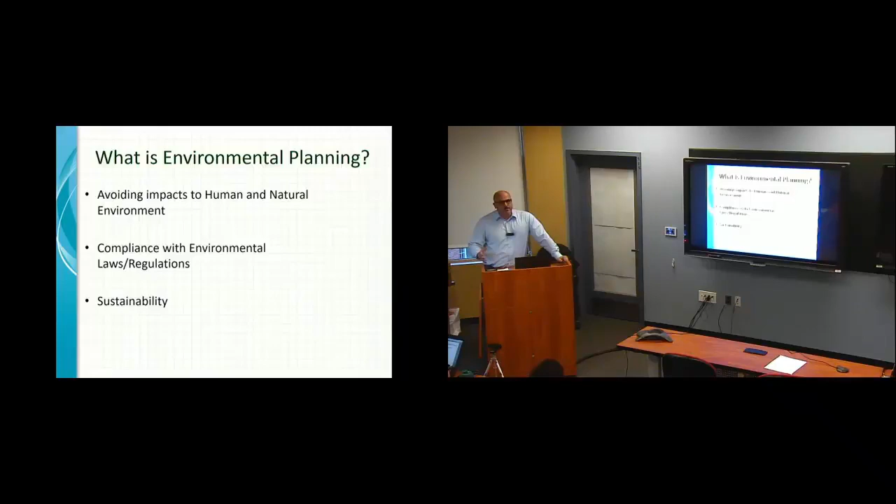I'm going to list the main regulations of planning a project. We have NEPA. How many have heard of NEPA? Okay, that's actually a good turnout. NEPA is the National Environmental Policy Act, which kind of set the stage for many of our environmental laws. Then on the state level, we have the New York State SEQRA, the State Environmental Quality Review. We're here in New Jersey, so I did some research on New Jersey. We have Executive Order 215.

Then we go back to a local level. New York City has a very comprehensive planning manual to help us build projects in the city, because it's very unique in the country due to the density and the different neighborhoods. Then we'll touch a little bit on environmental permits and law, some of the more common ones that I deal with for our capital projects. We'll talk about site assessments, which are more site-specific and deal with hazardous materials on sites. And then we'll look at some case studies. I'll try to bring it all together and describe some of the projects I worked on.

NEPA, as we said, is the National Environmental Policy Act. I thought this was a nice statement at the preamble of NEPA. This is really a very important milestone in the country to try to bring forth and protect the environment. You can read it on the board there, but again, it's really trying to protect the environment as we progress and as we build new technology and new projects. It was really our greatest effort to try to plan correctly as we go forward.

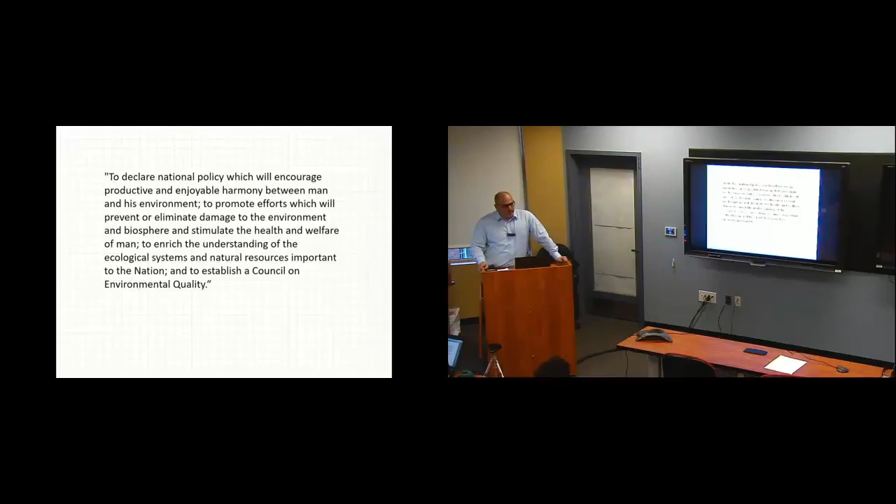NEPA requires, again, federal agencies to consider and calculate the environmental effects of proposed actions before going through with those actions. Now, a federal agency, obviously those are defined, but it also affects if there's federal funding in the project, you have to follow NEPA. So it's any federal action. You have to look at environmental, social, and economic effects.

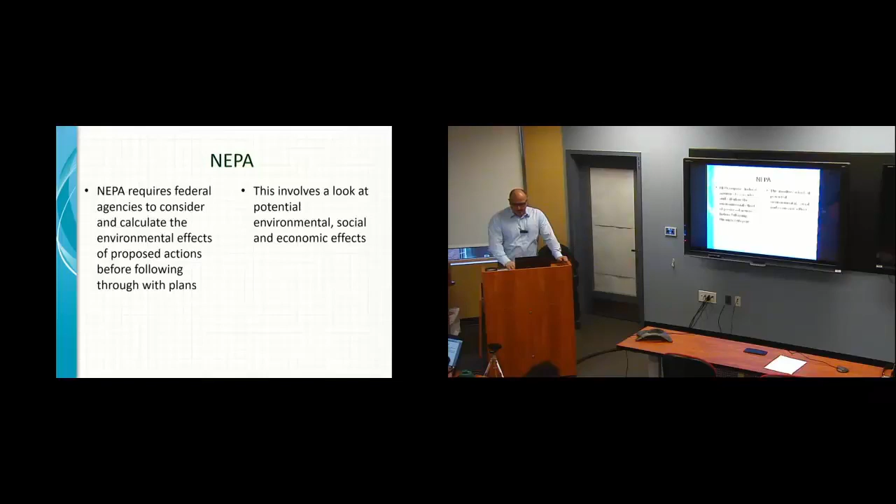Some terminology with NEPA. These are the different levels of environmental review. This will probably be new to many people, maybe not. What we have is a CATEX, which we call categorical exclusion. These are run-of-the-mill projects, routine projects. The next step greater than that would be an EA, or an environmental assessment. And that hopefully gets you a finding of no significant impact, the FONSI. And the last one at the end is an EIS, or environmental impact statement.

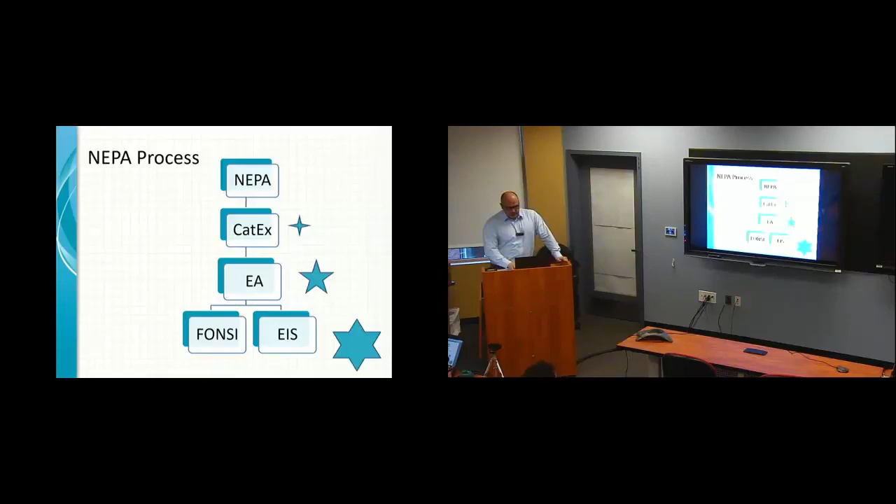And again, you have NEPA as the overarching environmental policy, and with these different reviews, basically you're increasing your review as you go from top to bottom: the CATEX, the EA, and then the EIS. Some of the main impact areas and evaluation points. So NEPA makes you take your project and basically do a screening on it and look at the various impact areas that your project may affect.

Public outreach is big in NEPA. They require you to go early and often to the public to get public input. The public many times has good ideas, and they're usually very familiar with the area you're building in. So you look at various areas like traffic, socioeconomic, public open space, urban design, cultural resources, air quality, the whole gamut of environmental impacts.

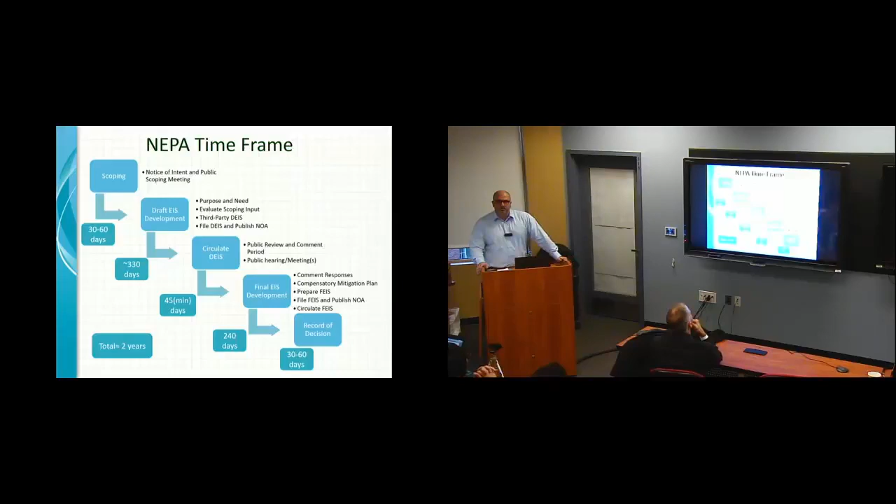Here's an example of a NEPA timeframe, and I put a few timeframes up there just so that you realize that this is not a quick process. This can be a lengthy process, and this has to be integrated into your project schedule. So for example, scoping, which is basically getting the project description out there to the public, maybe holding a scoping meeting. It's really formulating the project and getting a good, solid project description, and then going through the environmental impact statement process and reviewing the environmental impacts. And usually a typical EIS could take about 2 years before a project is launched.

The New York SEQRA law, State Environmental Quality Review, is analogous to NEPA, but specific to New York State. Much like the national guidelines, these are set for government agencies doing work. And here's just a little flow chart. Usually a proposed action is created by the agency. For example, let's say MTA wants to build a new bus depot. You classify that action. You establish a lead agency, usually the agency building the project. Then you determine significance, and then you determine if an EIS is warranted. And finally, after you finish your environmental impact statement, you have findings and an agency decision on whether to go forward or not. Then you can finally build your project.

So to give you examples, according to the SEQRA law, there are different types of projects. There's a Type 1 project, and an example of a Type 1 would be building on anything greater than 10 acres of undeveloped land. That usually requires an EIS, just to give you some scale of what we're talking about here. So if I wanted to build a 10.1-acre parking lot, normally that would require an EIS because I have to look at a lot of impact areas, including traffic, air, noise, etc.

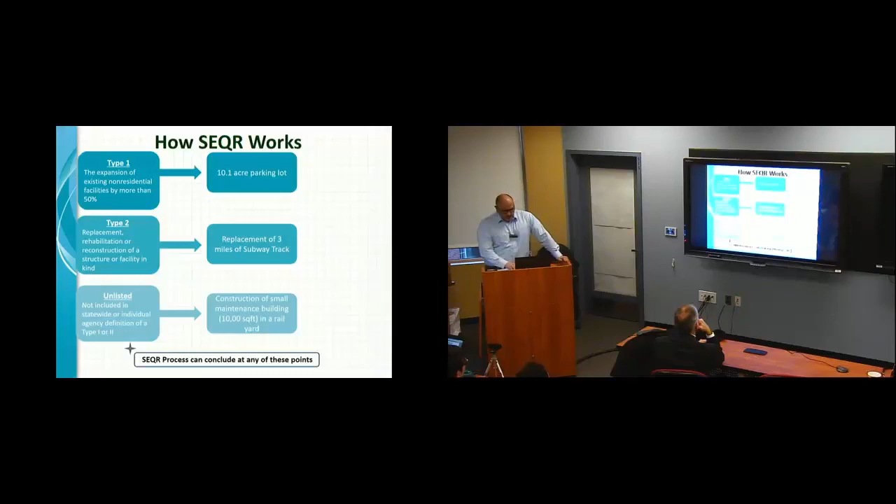Type 2, these are usually replacement in kind projects, and they require very minimal environmental review, if any. They may be exempt from the law. So for example, if I, as an MTA owner, wanted to replace 3 miles of subway track, although it's a very long stretch, it's really replacement in kind, so it's not really affecting the environment because the track is already there. Building new track in a new area would be a different story. And then you have unlisted actions, which are not Type 1 or Type 2, so they're kind of gray areas, and you have to use your judgment on whether you want to do an EIS or an EA.

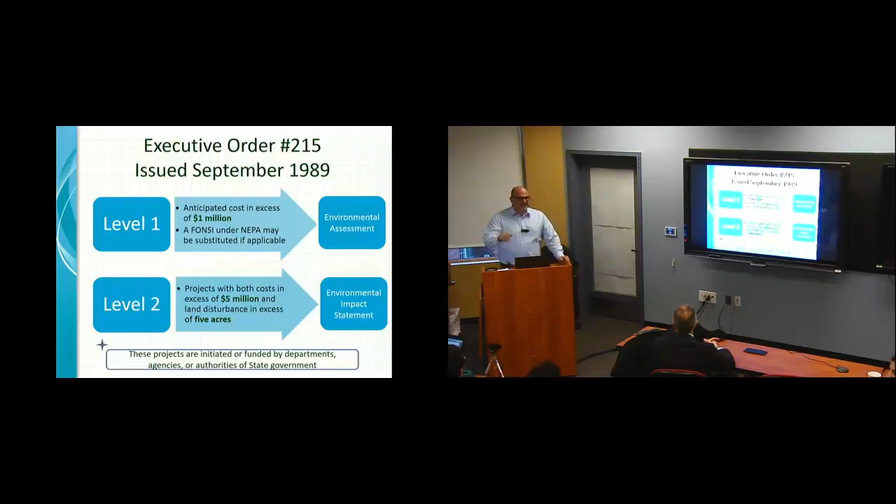Getting across the river into New Jersey, we have Executive Order 215. Is anybody familiar with Executive Order 215? Okay. Let me know if anything sounds incorrect. We have a Level 1 study, which requires an environmental assessment, or EA, and that's the lesser of the studies. Any public action that costs greater than $1 million would require an environmental assessment. And then you have Level 2, which are projects that usually require an EIS, and they're over $5 million.

However, there are many projects that are exempt. They don't want you to frivolously do environmental analysis. So a lot of replacement in kind projects are exempt: maintenance or repair, expansion of existing buildings. They realize that many projects are just rebuilding or rehabbing the existing condition, so they don't want you to go through a process that's not necessary.

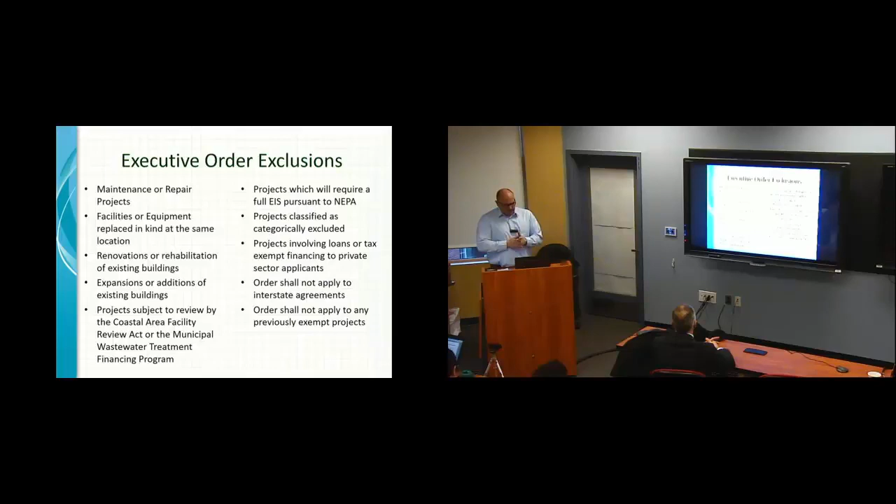Coming back to the local requirements, you have New York City CEQR, City Environmental Quality Review. Anybody heard of CEQR? So if you go online, there's a pretty large manual, guidance manual on how you do environmental impact statements and environmental analysis in New York City. And it's really our adaptation of NEPA and SEQRA into one manual.

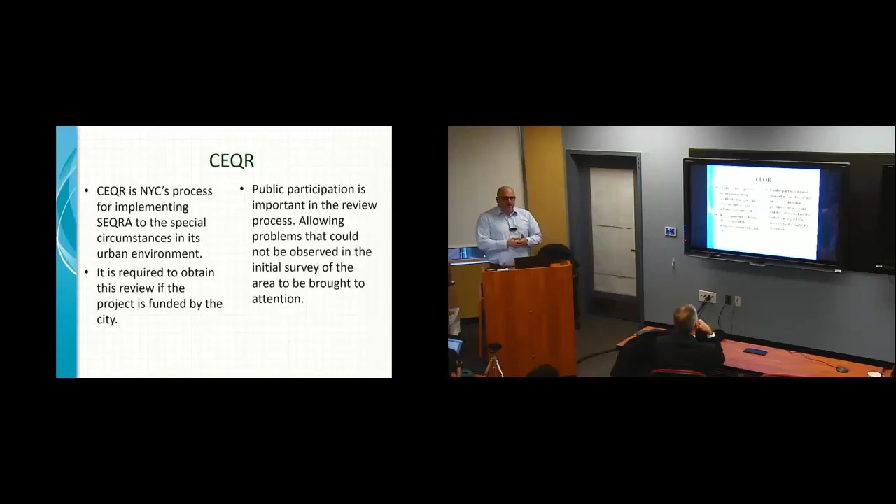Because NEPA and SEQRA are really just guidance. They talk in generic terms. I think they feel it's up to the professional judgment of the engineer or planner to do the appropriate environmental analysis. In the case of New York City, because of our population density, our building density, we have a set of guidance that we follow.

And CEQR does very good. It's very good at almost like a cookie cutter or a good table of contents where you can look at that manual and go through the various impact areas. And I'll just go through each one with a little picture just to show you what type of analysis we were talking about. So let's say look at land use, zoning and public policy.

I don't know if you know, but New York City, I believe, was the first in the country to adopt zoning. So once you're in a certain neighborhood, you can only build certain things. You have zoning for manufacturing, commercial, residential. Fortunately, MTA is exempt from zoning because obviously we have a unique situation where we're building a transit system. But if you were a private developer or another public entity, you would have to maybe comply with zoning and build within the character of the neighborhood.

Socioeconomic conditions. There's environmental justice, I don't know if you ever heard of, but you want to make sure that your project doesn't disproportionately affect minority or low-income populations. There's laws for that, and there's screening for that as well. Well, you don't want to affect any neighborhood, you don't want to affect badly the socioeconomic condition of a neighborhood. So you have to study that for your particular project.

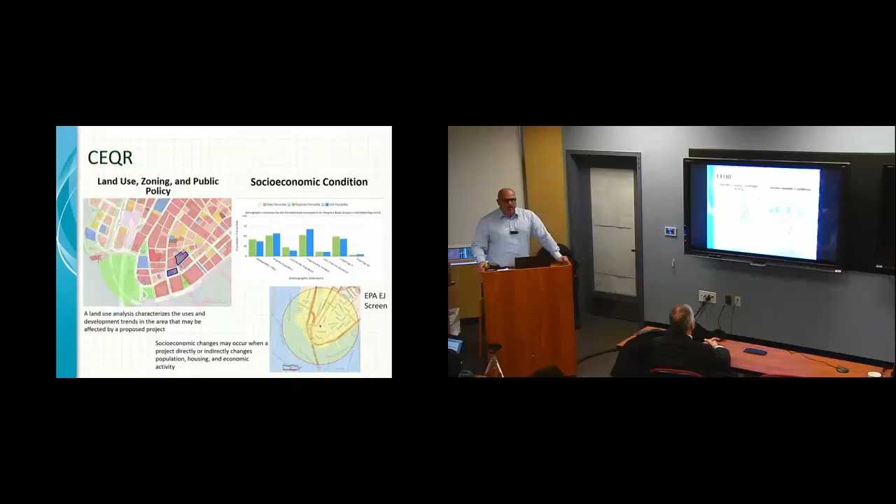So if I'm building a new subway station, usually that is a good thing for the socioeconomics of the neighborhood. Brings people in and allows people to get to the job markets. Community facilities and services. So if you're building a project in a certain neighborhood, you have to make sure that that neighborhood can accommodate your project. Does it have enough police? Does it have enough fire? Does it have enough schools to accommodate your project?

Open space. Parklands are afforded lots of protection under the law. New York City has a lot of zoning for open spaces. You want to make sure that your project is not affecting the open spaces in an area where people can go and have recreational activities.

Something unique to New York City is shadows. You want to make sure your project is not affecting an adjoining building. So for any building you build in New York City that has public funding and that is taller than 50 feet, you have to do a shadow analysis. So you would do a modeling, and you would see how the shadow affects adjoining buildings and even the streetscape.

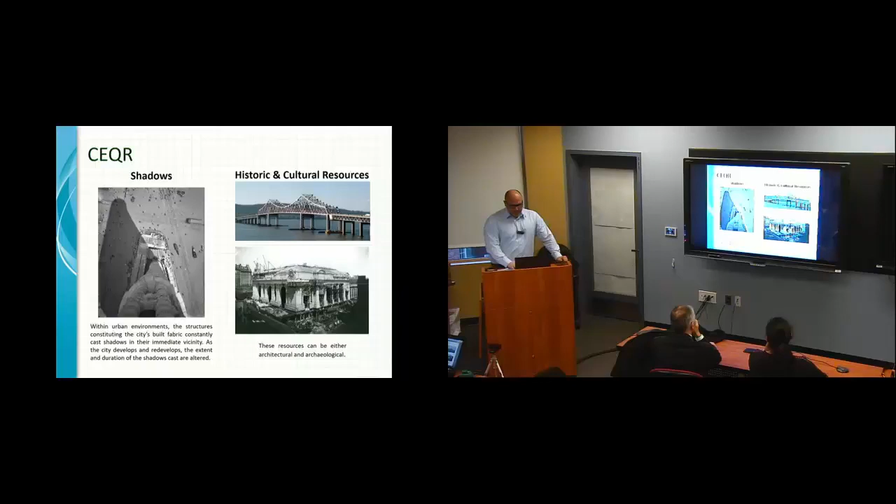Historic and cultural resources. We have many buildings here in our area that have both historic significance and cultural significance. So you would have a professional look to see how your project will impact those sites. Urban design and visual resources. You'll see how your project is integrated into the neighborhood, to the aesthetics. You want to make sure that you're trying to fit into that and not be a blight on that particular neighborhood or site.

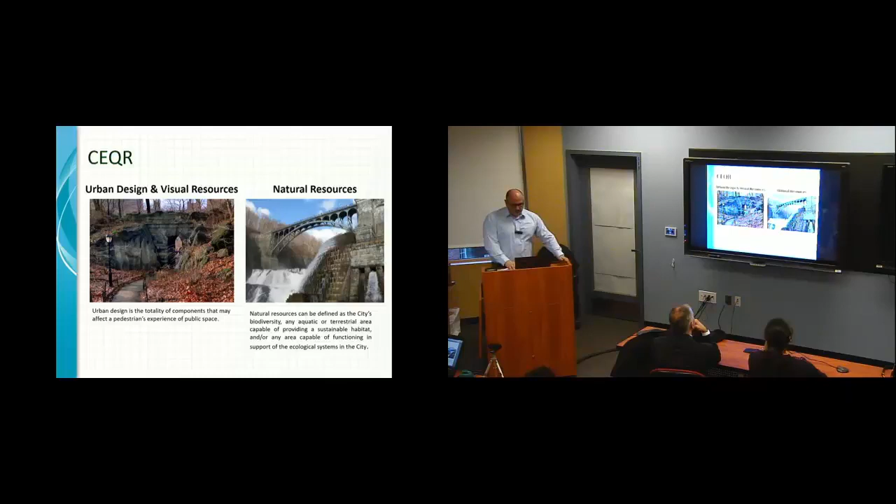Natural resources, you want to make sure you don't affect the water quality, wetlands of a particular site. We would hire third-party consultants and specialists to look at these, to see how this project is affecting the natural resources. Hazardous material. Anytime you build anywhere and you excavate, there are unknown conditions. You never know when you're on top of a Superfund site or if there's been illegal dumping at a site.

You want to make sure you do your due diligence, do historic records, maybe do some soil borings to see where you build, to make sure that you're not going to encounter hazardous materials, or at least have a plan in place so that if you do encounter them, you know how to treat them. Water and sewer. Again, you're building a project. You want to make sure that you have water utilities. If people are living there, obviously they need potable water, sewer. You want to make sure that that facility or infrastructure can accommodate that new project.

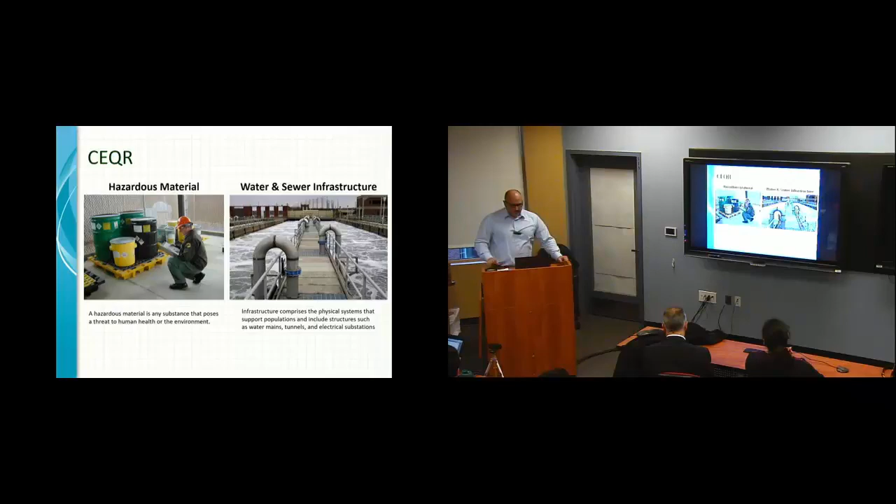Solid waste and sanitation. Same thing, if you're building a building with a large number of people, you're going to produce garbage, and you want to make sure that those services are available and they can accommodate you. So you do a study to do that. Energy, again, your project may have energy requirements, so you would do a study to see if there's enough utilities in the neighborhood to accommodate you.

This is very important for MTA when we build new stations. Obviously, we have large power requirements. We have trains running, we have a lot of lighting requirements, so we want to make sure we go to Con Ed, we tell them what we're going to do, and then they'll come back and give us comments on the project. Transportation, we want to make sure there's enough mass transit and roadways on your particular site to accommodate your project.

Air quality. How will your project affect the air quality in the neighborhood? We study both construction and operational impacts. So if you're building a new sewage treatment plant, how will that affect the air quality in the neighborhood? Or construction, how will the construction dust affect the air quality in the neighborhood, and what are you doing to mitigate that?

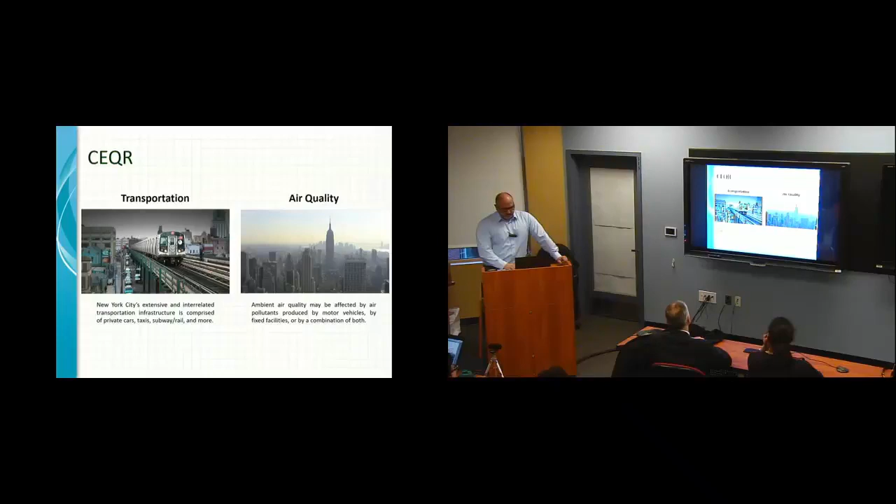Something that's been recently added, greenhouse gas emissions. How are you affecting the greenhouse gas emissions in the local region, your particular project, especially in the operating condition? What are you doing to mitigate that? Noise. Probably the biggest complaint that we get is about noise. Noise and vibration, I should say.

Anytime you're doing any type of construction, again, you're in a very tight environment, especially in New York City. We have a specific New York City noise code that we have to follow. It's pretty strict. So many times jackhammers have to be outfitted with some type of noise mitigation equipment. And the workers can only work at a certain time, usually from the hours of, I would say, 8 a.m. to 6 p.m. And if you want a variance, you'd have to go to the New York City DEP to get that variance.

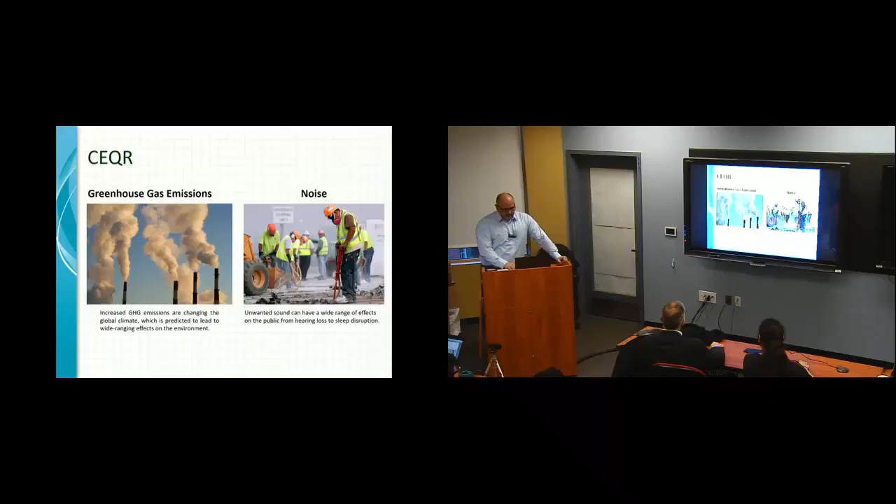And even in your operational conditions, once you build your project, for example, if you're building a new subway station or a new building, will the trains passing by affect the residences that are nearby? And how will they affect the residences? So usually as part of the environmental impact statement, you would do noise modeling to see how receptors are affected. Neighborhood character. Again, do you fit into the general neighborhood character of the particular city or region that you're building in?

Construction impacts. Construction impacts are, again, very big in the city, and very, very big for us. Because most of our projects, usually on the operational end, perform a good service. We give mass transit to people. Usually people like it. Sometimes people don't believe it. But usually construction impacts are our biggest issues, and where we receive our biggest complaints for projects. Because they're lengthy projects, they're noisy projects, there's obviously lots of heavy machinery, so we try to do our best to accommodate the public.

And general public health. How is your project affecting the general public health? Whether it's air quality, noise, aesthetics. I'll go through a little bit of environmental permits and laws now, but it's a good place to stop.

So, a lot of aspects, and I'm thinking some of them are fairly subjective, like fitting into neighborhoods, appearance, and so on. And some of them are objective, but getting to an answer requires very sophisticated, probably expensive modeling, like air pollution, CO2. So in practice, how do people handle all those variables? Each of them requires a PhD thesis to carefully analyze.

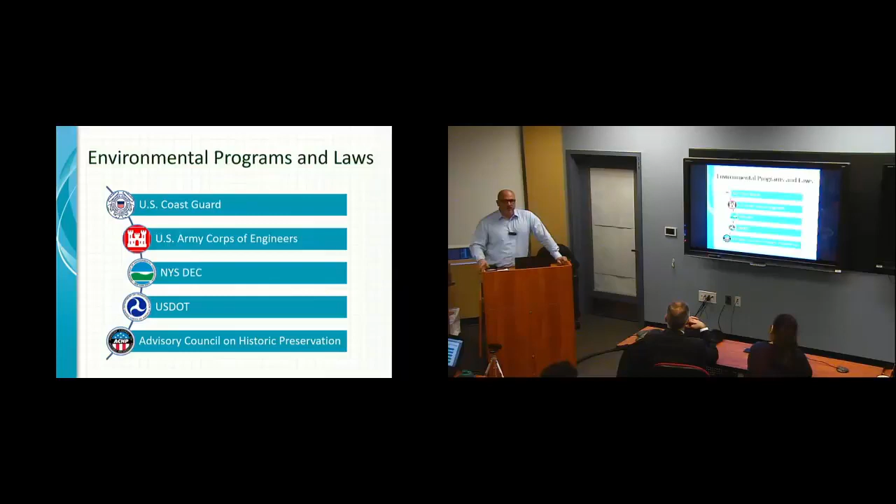One of the more common permits, anytime you're building or affecting water or wetlands, obviously very important as part of the environment, is the joint permit between Army Corps and DEC. So if I'm doing some construction on the water, for example, I'm doing some construction now on the A train in the Rockaways. We're rehabbing some of the track there, and we have to come with a barge.

We would have to notify the Coast Guard, since it is a navigable waterway, so they have to be notified. And also get the permit from DEC and Army Corps to make sure that we're using best management practices not to affect water quality and protecting the wetlands. And they might make the decision that we have to mitigate the wetlands in some way. So many times, if the wetlands are overgrown with invasive species, they'll make us mitigate and do it properly.

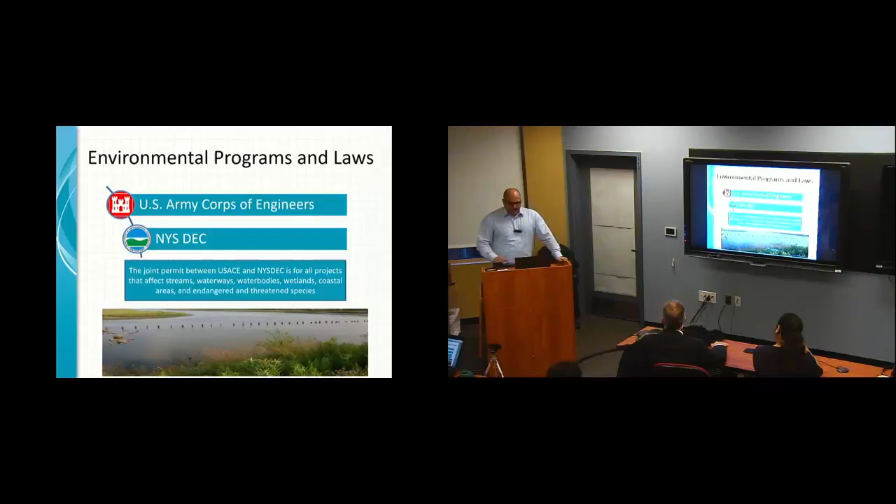Another popular permit is the State Pollutant Discharge Elimination System, SPDES permit. That's meant for outfalls of stormwater into any type of water bodies. For example, for one of my projects, I had a bus depot where we had to build our own storm sewer because there were no utilities in the area in Staten Island. So we had to go through this process to make sure that we're not polluting any water body. We're building a new sewer, and we're making sure that the water that comes out of it is clean. We'll go through a case study on that.

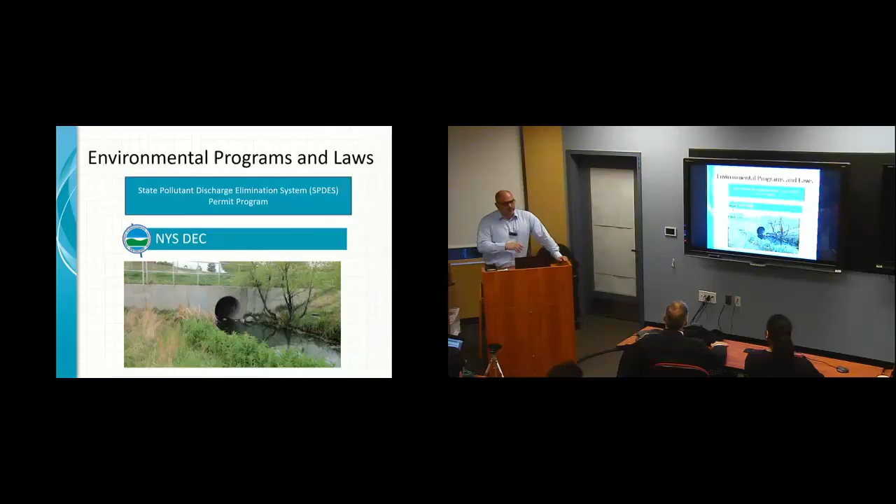So we have subway stations that are adjacent to parks. Sometimes we have to take parkland, even just temporarily. So they want to make sure that we're doing it in a way that the public is happy, the public is notified, and that we're actually enhancing the park after we leave.

Advisory Council on Historic Preservation. This council was created when the first historic preservation laws came out. I don't know if you know the story of Penn Station. Penn Station was a beautiful structure at one point and was taken down, I believe in the 60s. And I think that there was an outpouring of people concerned about historic preservation in the city, and then laws started to come out on protecting historic preservation.

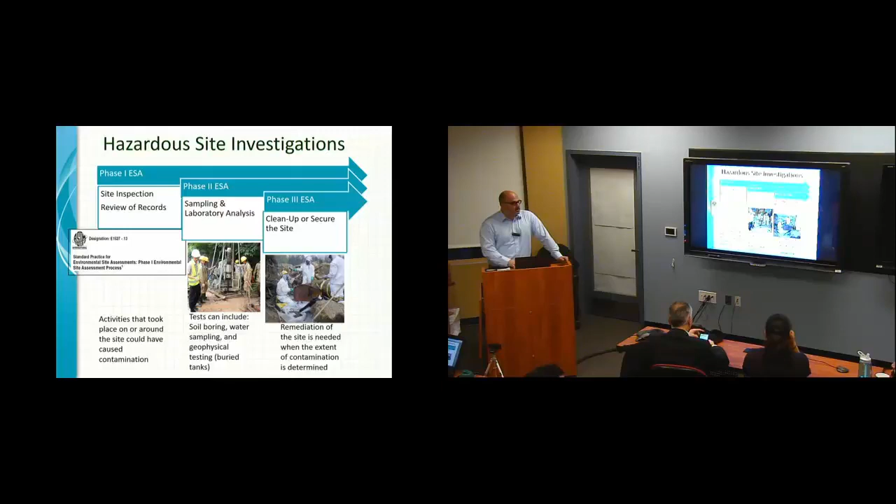Right. But finding land is a big part of our capital program. When we need a new bus depot, or let's say the Second Avenue subway, when we're going outside of our right-of-way.

I'll go through a couple of case studies now just to highlight some of the important issues. These are tremendous projects. These are big projects in that you could spend an hour on each of them if you wanted to. But I'll just highlight certain areas that I think are important and kind of emphasize what I've

spoken about. Tappan Zee Bridge, I'm sure many of you know that the Tappan Zee Bridge is being replaced and is under construction as we speak. It was the new New York Bridge. It was obviously there to keep the vital connection between Rockland and Westchester County. MTA was involved. I believe they were thinking about putting a rail line on the bridge. I don't think it's going on now, but I think that is a future possibility.

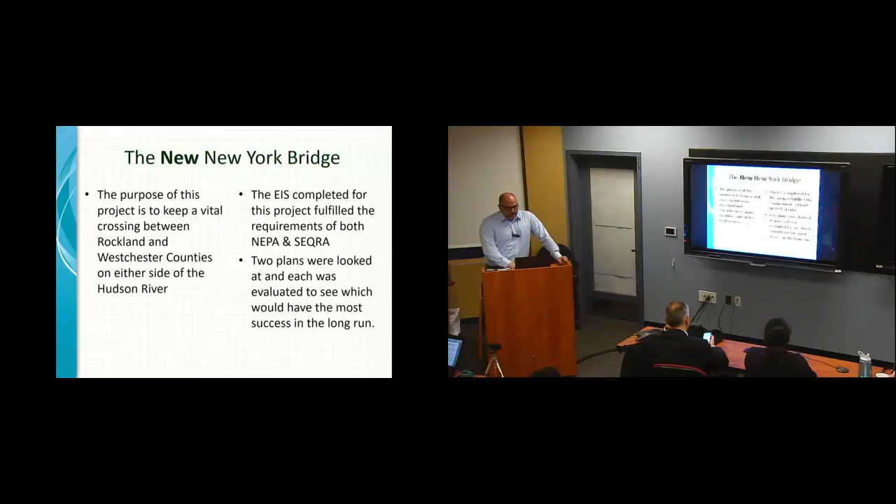The EIS was completed both under NEPA and SEQRA because they did receive federal money. Both laws were complied with. And obviously, they did an extensive alternative analysis when they did the Tappan Zee Bridge. Lots of waterworks, so you had lots of permits, Coast Guard, it's a navigable waterway. Army Corps and DEC are doing dredging, moorings in the water, a lot of construction in the water. So you had to get vital permits and make sure you're following best management practices not to affect the water quality while you're building the bridge.

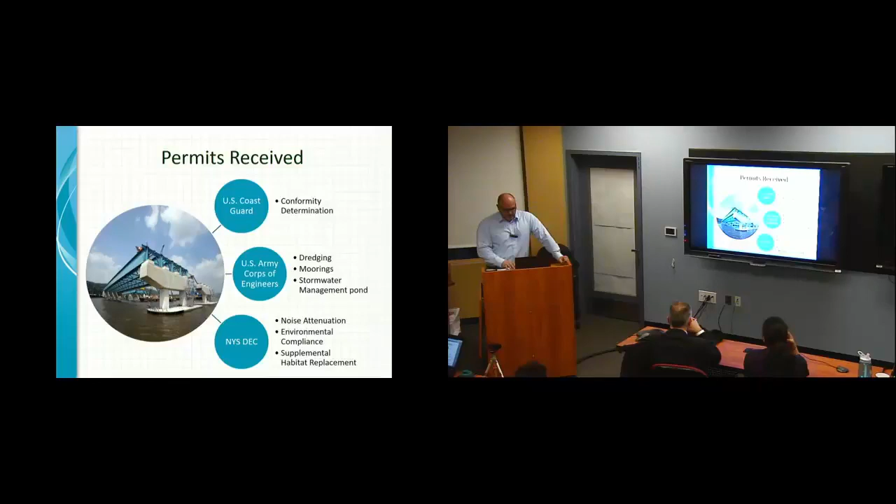One of the studies I had found out in my research is that they wanted to see how the wildlife or aquatic life was being affected when they're doing pile driving for the bridge. And they did, I think, find out that some aquatic life is traumatized by pile driving, noise and vibrations. So they tried to mitigate as best they could during the construction process.

Good psychological health for the fish. Yeah.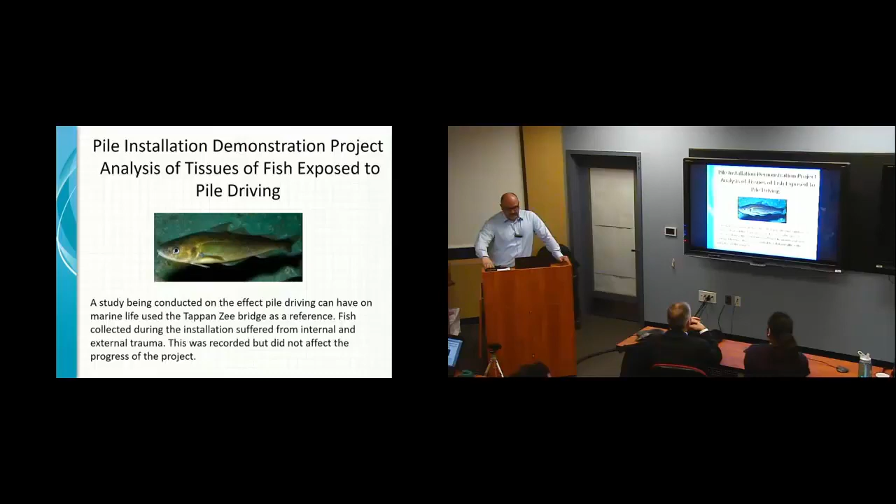Just to give you an example of the timeline of this project. So New York State announced the start of an EIS, Environmental Impact Statement, in November 2000. The EIS was published in 2002, and it took 10 years to develop that EIS into a draft form, March 2012. So they went through extensive alternative analysis and impact analysis, community outreach, community boards. I'm sure a lot of politics were at play, budget is at play, but it took, again, you can see from 2002 to 2012.

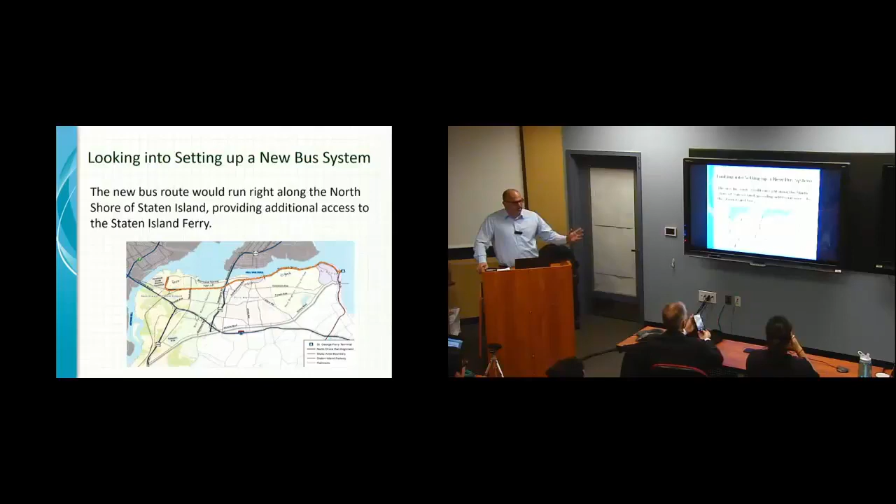It's a little bit too expensive, we feel, to try to reuse the track and put a subway corridor there, which would be probably double the price. So it would be much easier to use that land and maybe put bus rapid transit to move people from the west side of Staten Island to St. George terminal. And that's being studied as we speak.

Put the little bus on the tracks. There's a picture of the abandoned freight line. A lot of things that we have to look at are property ownership. We're adjacent to properties all along the right of way. Sometimes we maybe need a little bit more space, so we have to do real estate transactions or try to get additional property.

Shoreline stabilization and resiliency. Since Hurricane Sandy, our standards have changed in terms of flood protection. We're no longer just designing to the 100-year flood, which was done for many years in the 100-year floodplain. Now we're designed to category 2 plus 3 feet, which is probably the equivalent of the 500-year flood plus 2 or 3 feet. So a much higher design standard for work near the water. So we'd have to rebuild the bulkhead there, as you see.

Noise and visual impact for residences. Now, if you live there, instead of an abandoned freight line, you now have buses running in your backyard. So you want to study how the noise or the visual impact will affect you. And we're also looking at pedestrian access, whether we put a bikeway there or a walkway. And I guess this would go through the EIS process. And we would seek to get federal money, so we'd go through both NEPA and SEQRA.

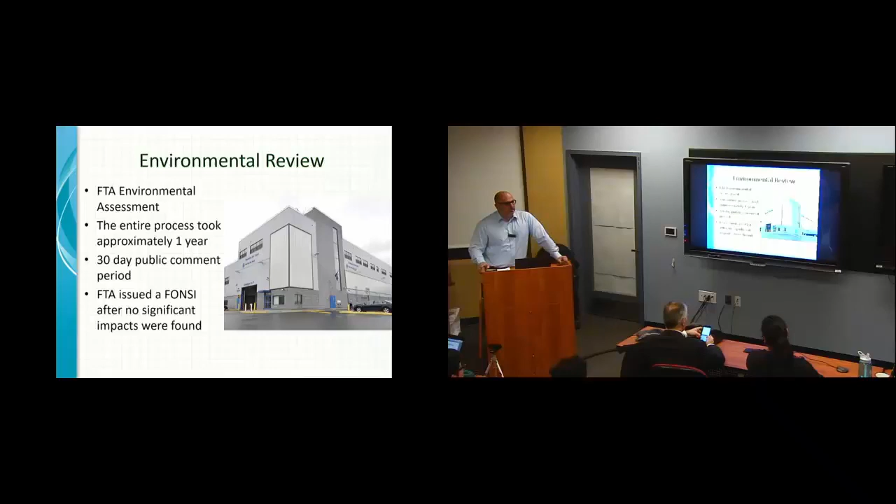Obviously, when we build a new bus depot, when we induce traffic, new buses in the area, we're looking at air, traffic, and noise. Those are the big three. We have a lot of mitigation measures there, I'll go through quickly, because we had to build our own storm sewer. So we went through the SPDES process from New York State DEC.

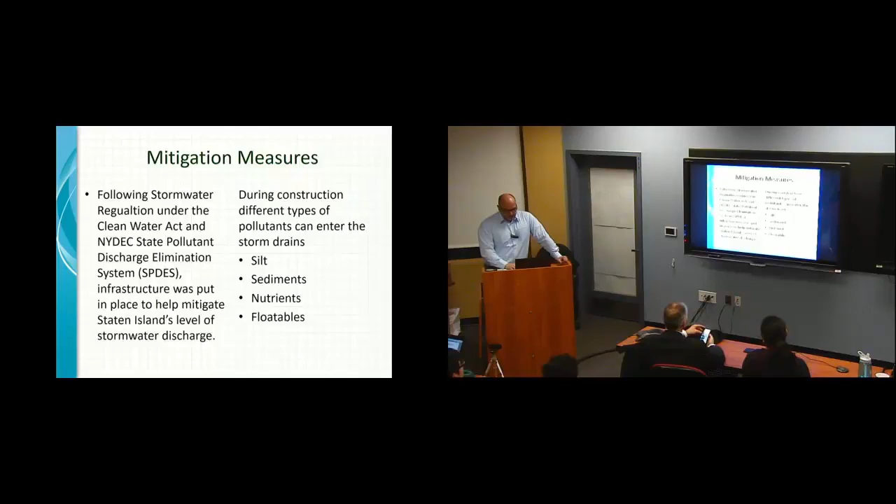So you basically have undeveloped land where water is filtering into the ground, but now you paved it, so now you have to take that water and drain it properly. So we had to build a new storm sewer going into the Arthur Kill. It was a challenging construction site because there was lots of clay, it did not filter well. As you can see, on a dry day, we have a swimming pool.

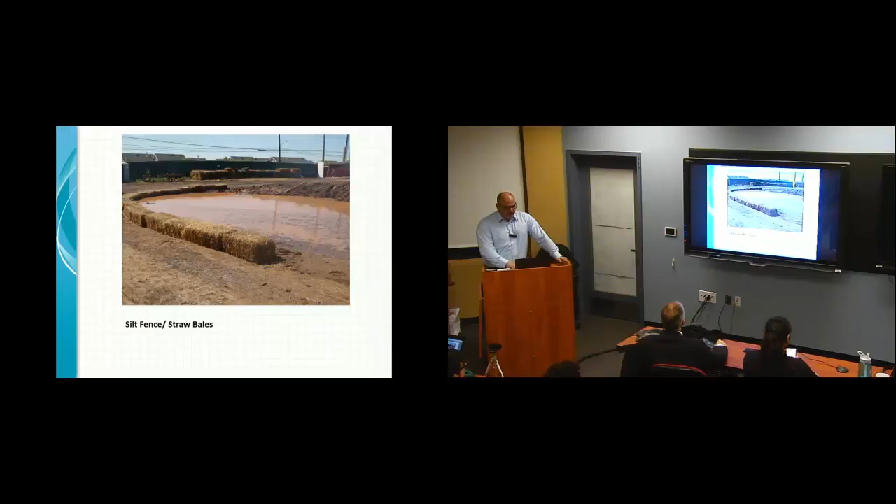It was very difficult to stop that construction water from going into the street. So we were going to try to capture it and then let it filter down to the underlying sand layer, which was a little bit deeper. You could see hay bales around the construction site to try to stop silt and sediment from getting onto the street and onto the water body. This was protecting the catch basin.

Eventually we set up hydrodynamic separators in the parking lot, which would capture any silt or sediment. It goes through a baffling system and chamber system to collect any sediment from the parking lot before we would discharge it through the outlet pipe.

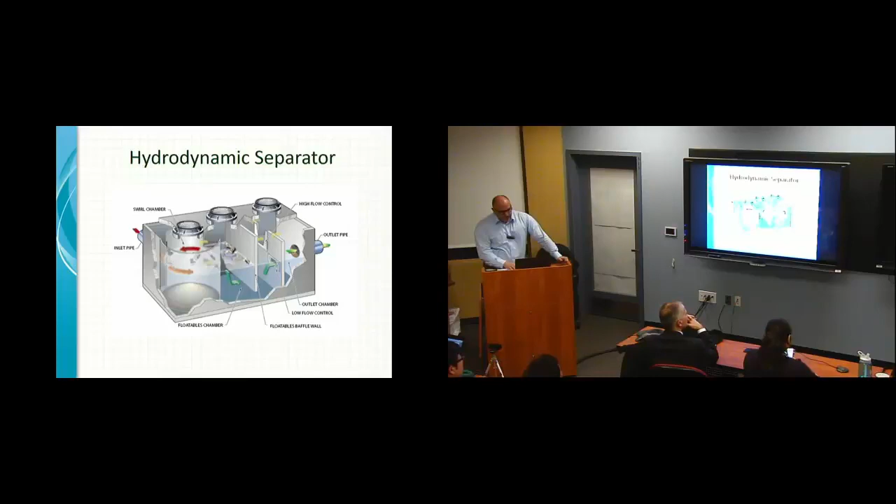Last, the 2nd Avenue subway just opened on New Year's Day. It's a long project in the making. This is an extension right now of the Q line that goes up to 96th Street on the Upper East Side. It finally gives residents of the Upper East Side a mass transit segment where they can get quickly to Union Square. And it alleviates crowding on the 4-5 Lexington line, if you've ever taken the 4-5 train.

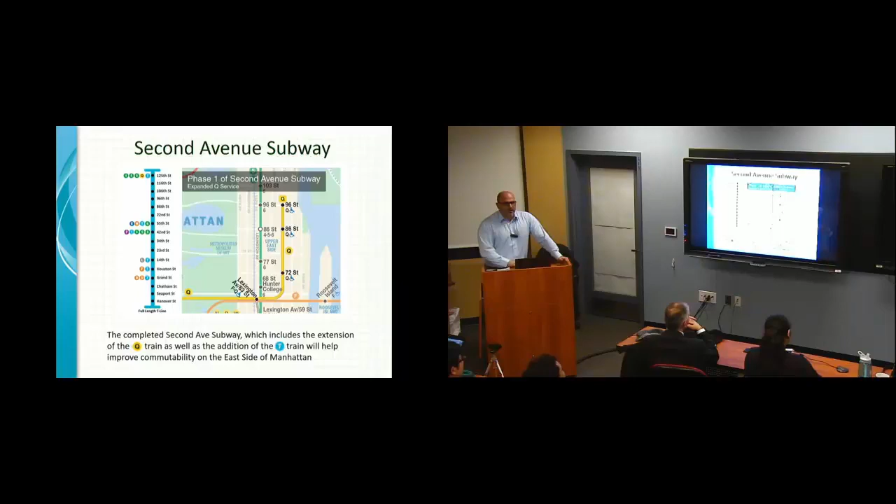Main issues for the 2nd Avenue subway: on an operational case, the subway is obviously a benefit. It's so deep that most people don't know it's running. You don't feel vibration. We used the TBM. It's within the bedrock. However, construction lasted a long time. People were affected. You have lots of air, traffic, noise, and dust control that had to be dealt with during the construction process. And probably the biggest problem, where MTA was sued in several places, was real estate acquisitions.

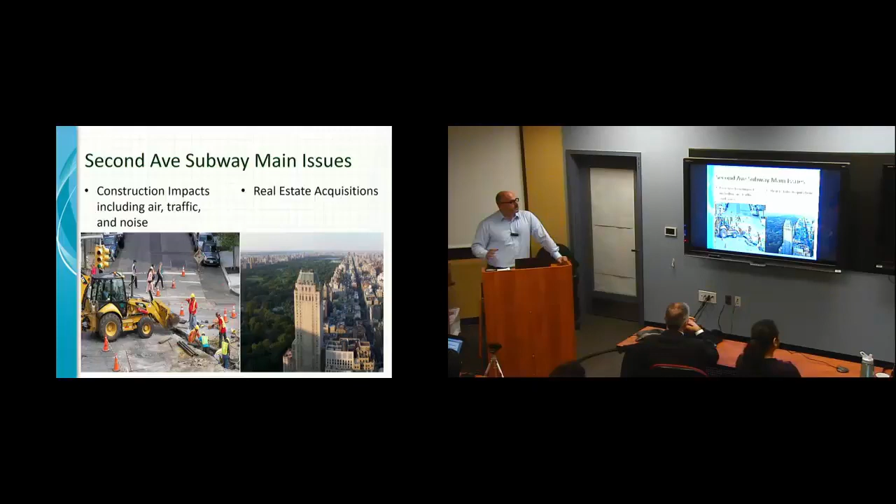Even though the subway's underground, we have to get above ground, so we need station entrances, we need ventilation gratings, we need vent plants, all to service the underground tunnel. That requires real estate, in an area that's really congested. So sometimes you have to take land; you try to buy it, but sometimes you have to go through condemnation or eminent domain procedures and forcefully take the land. And these are some of the main issues for Second Avenue subway.

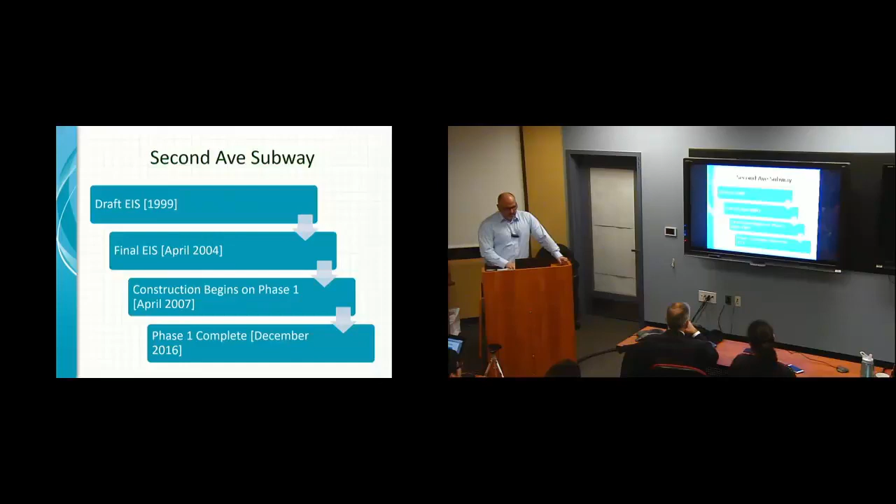Just to give you a quick timeline on how long this process may take, a draft EIS was issued in 1999, a final EIS in 2004. We began construction on phase 1 in 2007, and it just opened December 31st, 2016. So you can see these projects are decades in the making.

Just the points to come away with: check or review laws that apply when you're building a project. Make sure you involve agency and community stakeholders, community boards, and any agencies that you think might be affected. Go to them early and often. Look for similar projects in your region to see what type of impacts they've had, and anticipate lead times for approvals for your project so you can schedule them accordingly.